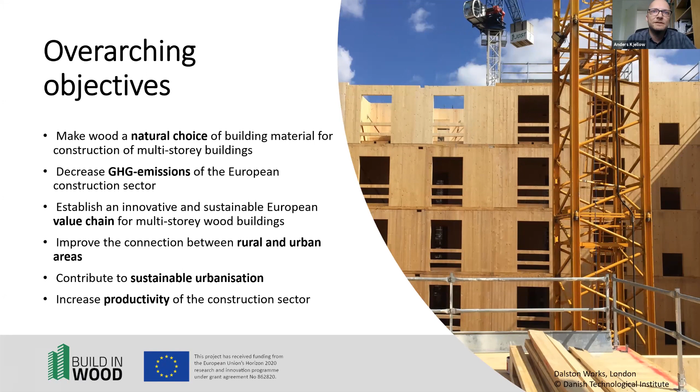We have the societal challenge of urbanization and increasing population, and we have estimated an annual demand for new apartments in Europe alone of about 1.6 million per year in the time between 2020 to 2050. So we have a very large demand for building materials. And if you look at new construction, the emissions from material production are now higher than the expected emissions from the lifetime operation of new buildings. And so there is a need for us to focus on emissions from building materials and not only on operational energy emissions.

There are, of course, many reasons to build with wood. I will not go through all of these, but just to mention a few here. From an environmental point of view, wood is a renewable material, the only one of the major building materials that's renewable. It gives us great opportunities for greenhouse gas reductions through both sink effects, because wood stores CO2 as it grows, and through substitution effects by not using more energy intensive materials.

We also have a range of economic possibilities. Building with wood enables fast construction. It's a light material. You have possibilities of putting more stories on fragile terrain. You need less infrastructure on site. You have fewer transports because it's a light material. It's very well suited for prefabrication, which gives you a high productivity in the construction sector. And so all these things translate into economic opportunity.

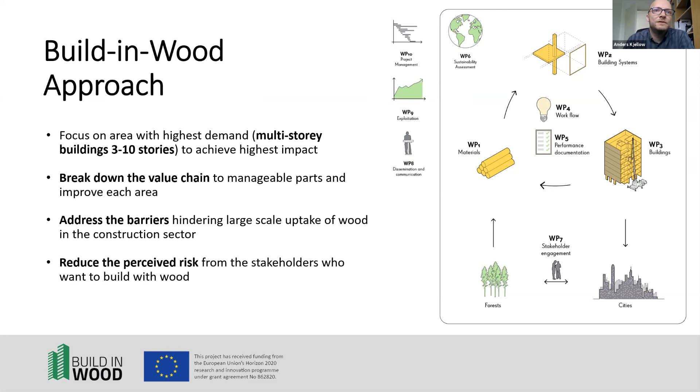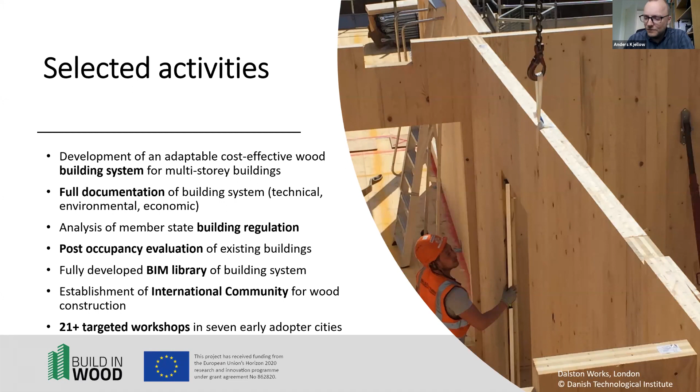We establish an international community for wood construction, and we work directly with cities, arranging more than 20 targeted workshops in these 7 early adopter cities. And so the list goes on. These are just selected activities, but some of these we'll hear about today.

We will start with hearing about the early adopter cities and some common challenges and opportunities, presented by Sabina Leopa from URBASOFIA. So with that, thank you from my side, and over to you, Sabina.

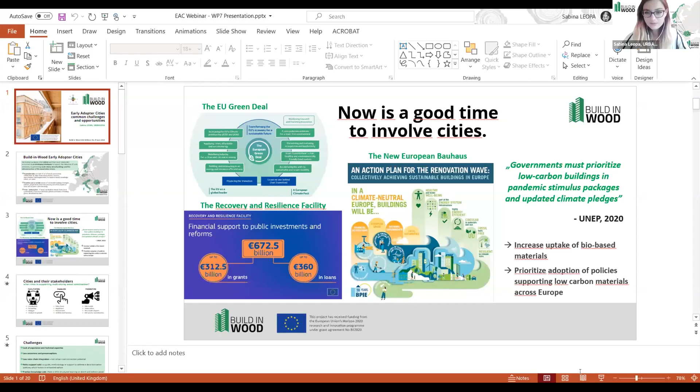Thank you, Anders. Here we are. My name is Sabina Leopa. I'm an urban planner, I specialize in regional planning, and I'm here on behalf of URBASOFIA. We are team leaders of the involvement of external early adopter cities, as we call them.

During this webinar, we want to tell you why we involve cities in this project, and why we think cities and metropolitan regions are very important to include in the discussion about supporting multi-story wood buildings, and why their unique role at the articulation between European policy and on-the-ground innovation is key to getting the agenda going.

So what we do in the project is involve the early adopter cities, EACs as we call them, in developing strategies together to support the reduction of greenhouse gas emissions via the use of multi-story wood buildings and via support mechanisms for multi-story wood buildings.

They have 3 roles in our project. The first is to let us know their needs and requirements, to provide us with data that the project can use, and this part in particular will be covered by the next presentations of my colleagues.

The second is to define and co-create together with a community of practice, a growth coalition at local level — external stakeholders such as building companies, architects, engineers, universities, providers of training, sustainable strategies and pathways — in order to support multi-story wood building in their cities and metropolitan regions.

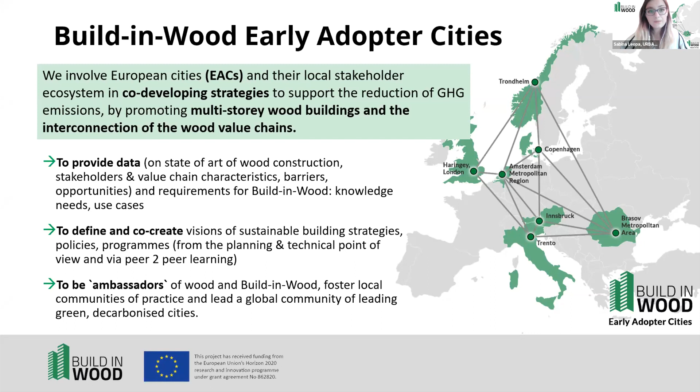We think this is a very good time to involve the cities, because if all construction activity, including renovation, is taken into account in the analysis being conducted at the UN until 2060, construction activity carbon is set to exceed 230 gigatons. The emissions gap report from 2020 from the UN Environmental Program identified that a green pandemic recovery could cut 25% of the predicted 2030 GHG emissions.

So now we feel that, at least in Europe, with the Recovery and Resilience Facility putting 37% of the recovery funding into a green transition, this is a very good point in time to prioritize the adoption of policies supporting low carbon materials across Europe.

What we think about cities is that they have this key opportunity to be facilitators, to coordinate the shift to greener development, to coordinate partnership and local dialogue, but they're also enablers — and this is the interesting part we try to tackle in the project.

They have policy levers that can enable wood either implicitly or explicitly. They can develop regulations, they can change procurement to not be dismissive of wood, and they have the possibility to develop facilities and financing. And last but not least, we see them as role models and as inspiration for other cities as well.

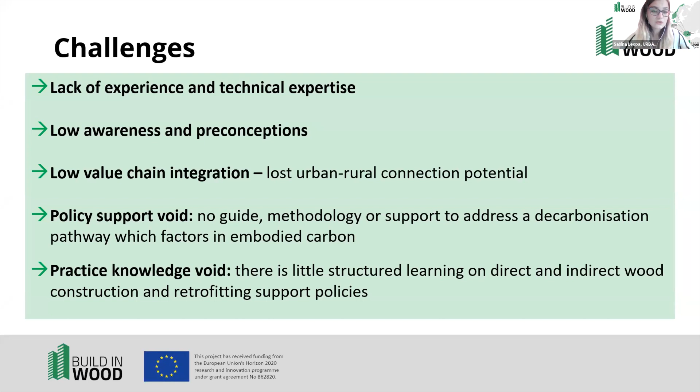So we started from these general challenges, and within Work Package 7, what we did was start involving these early adopter cities, which I'm going to present one by one, to create local communities of practice, to address their ambitions that are either strategic, like net zero strategies, or operational, like new regulations for the built environment, and to support their local dialogue in order to reach these pathways.

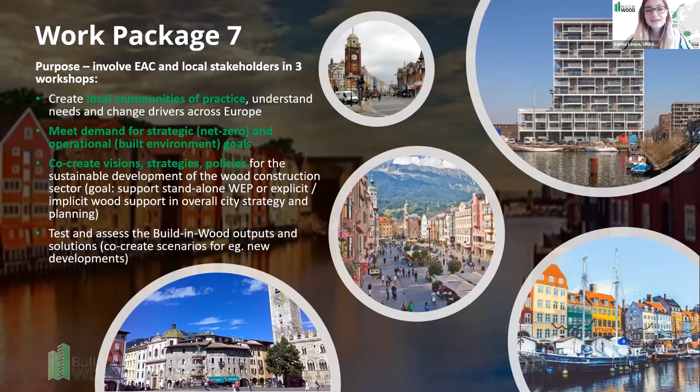Last but not least, there is the possibility to have real life scenarios and real life cases for the Build-in-Wood project, for the design guide and design manual, something that you will learn from my colleagues in the next presentations. So just as a helicopter perspective of what we're doing, we have an iterative process.

We have established a link, a cooperation with the early adopter cities, and they have set up local working groups, so key stakeholders from all the environments. We've prepared a set of questionnaires to understand the needs of these cities, and we looked at their policies and the local context. And then we had a first workshop, which we're going to tell you all about.

And we talked about challenges and opportunities that are personal and specific for that city. And then we looked at the common challenges. In the next steps, we are going to have two more workshops, and we are going to have a European dissemination and networking period.

In what concerns the first workshop, just a very brief introduction to it: the pandemic hit, and then we had this weird online and offline discussion series with all the cities. But all in all, I think that this first workshop actually offered up two very important conclusions.

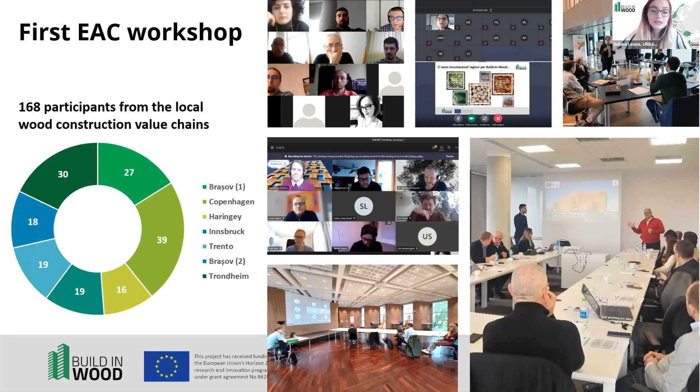One of them is that while all cities have very specific needs, like densification or building up or building out of existing buildings or renovating, or the necessity to supply more housing, all of them have the same legislative, regulatory, conception, and training gaps, and all of these other challenges that could be addressed in a unitary manner.

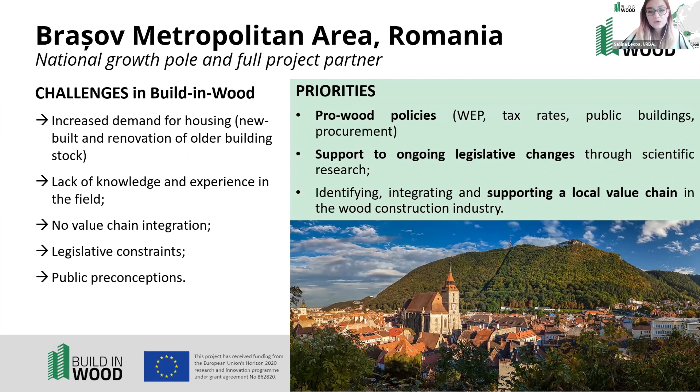We started with the Brașov metropolitan area, which is the full project partner in Build-in-Wood. Just to show you a little bit about the priorities discussed so far, they're looking at pro-wood policies, such as tax rates or wood enabling policies, public buildings and procurement. They look to support ongoing legislative changes in Romania because there is an ongoing movement to redo the whole building code and planning code, and of course to integrate the local value chain.

We are also happy to welcome Copenhagen, and for the last year and a half we worked with Copenhagen on their priorities because they do have a very strategic-oriented approach to enabling wood in the built environment. They have some challenges regarding legislation and building codes.

And of course, each of these cities has gone through a workshop where they discussed what the gaps are and what the priorities would be. So now we can look at strategic pathways going forward.

Haringey Borough is focusing on a retrofit-first approach and is aiming at supporting a building-in-wood policy, either standalone or part of a larger embodied carbon policy, which ultimately could scale up to the whole city level. And of course, there are a lot of challenges they want to address, both about conception and strategy, but also about very operational questions such as ensuring interoperability and encouraging potential future reuse, incorporating circularity principles in the built environment.

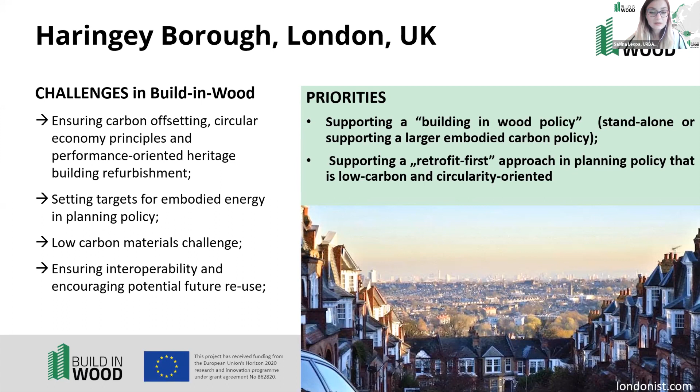Innsbruck is having some interesting challenges about a high density urban area that is constrained by natural elements.

So for them, they want to actually support the shift to wood in this context, and they look at policies for timber construction support, carbon accounting, and perception change at local level, because the perception of wood destined for wood cabins is something shared with Brașov, but it's something that stops consumer adoption of wood at a larger scale.

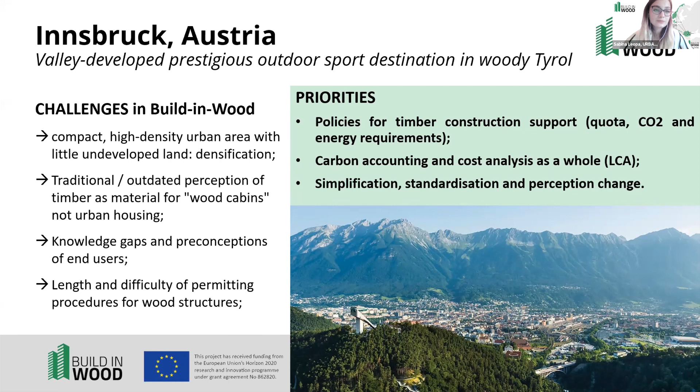Trento is having the same high density urban area issue, and they're looking at the retrofitting needs they have. Their priorities are a city sustainability strategy and embedding wood building in the green policy framework. They are Italy's greenest city, and it's very important for them, because of the natural surroundings, to address this value chain fragmentation and address missing links.

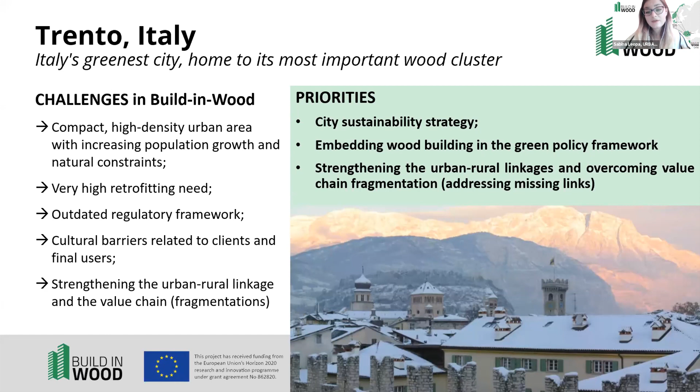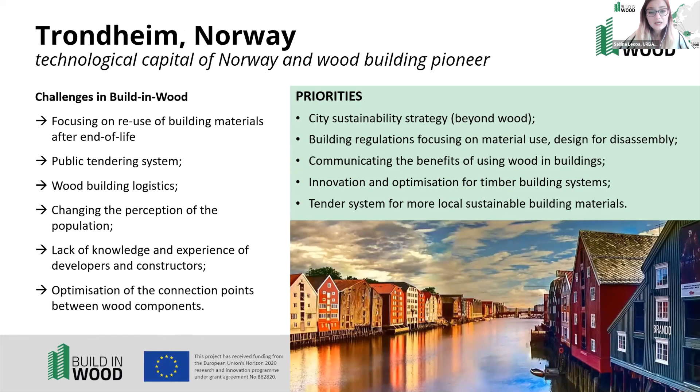So that the urban-rural linkages for local development, a local industrial development for this sector, are supported. Trondheim are our wood building pioneer. They have a lot of experience in building in wood and creating wood supporting policies, and their priorities going forward are the focus on city sustainability as a whole, including and beyond wood, design for disassembly, material use included in building regulations, better communication, innovation and optimization for timber building systems, and they also want to look at the tender system.

Last but not least, the newcomer we're very proud to welcome is the Metropolitan Region of Amsterdam, and they will have their first workshop next week. They share a general challenge with the other cities, but they are also a frontrunner in circular economy solutions. So their priorities would be on policy development, on standardization, and on the integral assessment of sustainability on a systems level.

What we did was cluster at the end all these common challenges and try to support a program that addresses each of the challenges based on its categories: ambitions, targets, visions, legislative and local policy, financing and tendering, LCA measuring and monitoring, and communication and perception change.

Our next steps right now are to focus on two points in the second local workshop. We will have a strategy and policy part connecting all these challenges to either implicit or explicit wood support policies and approaches—for example, looking at building regulations, carbon limits for public procurement, and how to adapt local regulations to be more wood positive.

On the other hand, the Build-in-Wood project is quite advanced right now, so we will also address the possibility for technical and scientific cooperation, connecting local knowledge needs with our evidence-based research in Build-in-Wood, which we'll share a bit about in the next presentations, and also address specific programs such as renovation and densification with digital pilots and technical outputs.

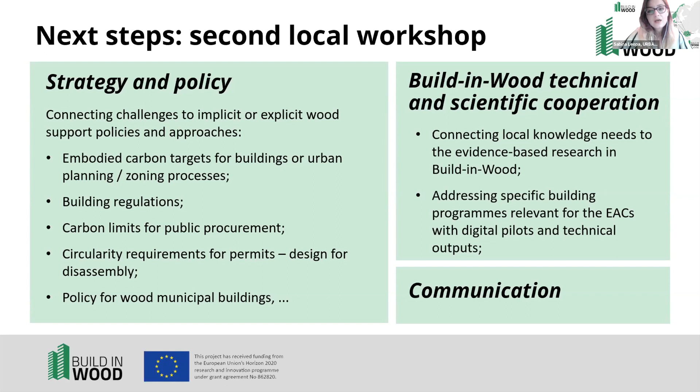The outlook for our final task in the project that we are preparing right now is the methodological transfer and replication support, and our ambition is to ensure the impact not just at European level but at global level, and we're very happy to welcome in this webinar professionals from all over the globe.

We want to widen the cooperation and support other stakeholders and cities, with priority cities, metropolitan regions, and also regions, to join the discussion and join the community that we are going to launch, and also to have policy learning that would support European policymaking for multi-story wood buildings.

It's so great that so many of you are here today to join in this and have such an interest in building in wood. We've been a practice that has focused on sustainable architecture for the last 15 years. We've been building in engineered timber for that time and have become internationally known for our experience in timber construction. So we were delighted to become part of the Build in Wood programme.

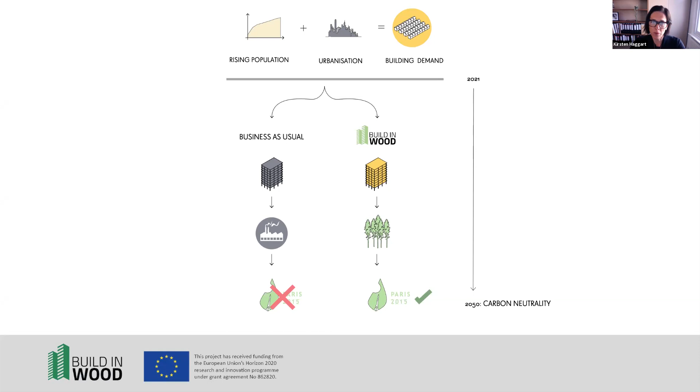As we all know, and I think has been expressed already, if we carry on as business as usual, we won't be hitting the targets we so desperately need to hit. So the reason for Build in Wood is to make timber construction methods common practice in the European construction sector, and to make it easier for stakeholders to choose a healthy and sustainable alternative to traditional construction methods and systems.

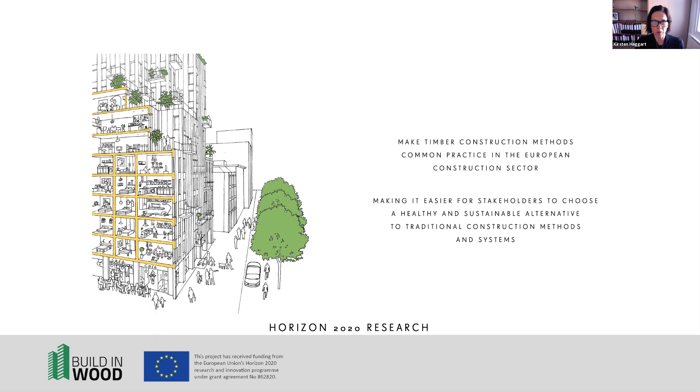So what we're doing is trying to break down barriers, and it's a really fascinating project because it goes from testing small components to understanding what the policy constraints are for timber construction.

I'm just going to talk briefly about the structural system. Our brief primarily was to design a multi-story building system for between 4 and 10 stories, as we felt this was a sweet spot for the kind of development European cities are looking to pursue. It should be adaptable for both commercial and residential use, so from the outset we're thinking about demountability and change of use throughout the process. It also has a facade panel which can be used on retrofit as well as new build.

We're looking at different climatic conditions across Europe and different regulatory requirements, which we've analyzed with our partners to understand the range of thermal, acoustic and fire requirements for buildings across Europe. We're also looking at retrofitting, which is a key part of becoming zero carbon, because we need to upgrade our very low quality building stock.

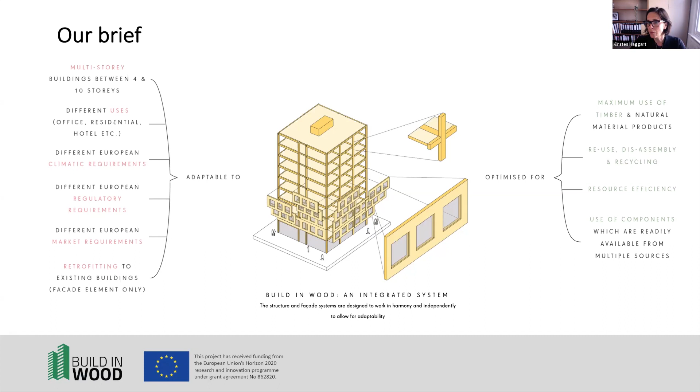So we need to optimize it for reuse and resource efficiency. When thinking about the principles for the Build in Wood system, it's integrated so it can be adapted to different uses. It needs to promote the use of timber, and it needs to be adaptable, considering the criteria for each project.

The way we've designed it, when you're using this system, you can plug in your different regulatory requirements. You can plug in what your uses are, whether residential or commercial, and then apply those individual requirements to the system.

We've developed a range of different build-ups and details for the system to cover low, medium and high regulatory requirements, and we've looked at different material solutions. The system itself is currently going through testing and accreditation.

The key aspects of the system, when thinking about using it, are to define the dimensional range, define the materials we want, and define the beam orientation, so that we know all the services will work in a sensible way.

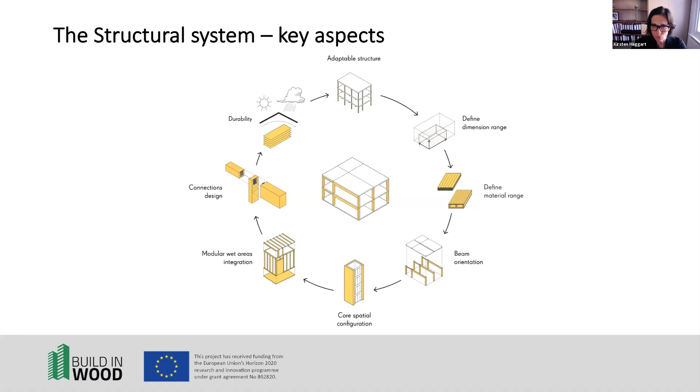The adaptability of the structure is key. We found that if we took this small area of Hackney in London and applied the system to a range of buildings, and given that the system can be increased or decreased in size and can change in use, we discovered that 70% of this area of London could be rebuilt using the system, as you can see here.

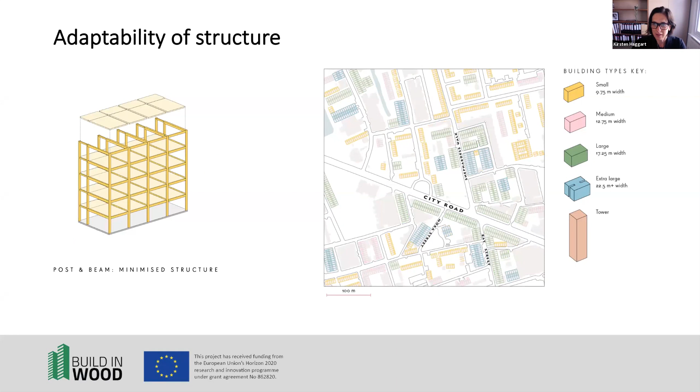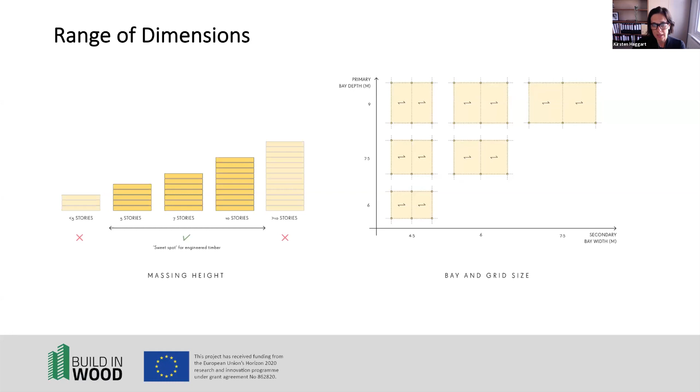As I mentioned, it ranges from 5 to 10 stories, and with that we have a range of bay and grid sizes to accommodate that. Obviously, commercial use requires bigger spans than residential. Fundamentally, it's a post and beam system with CLT or rib deck floors.

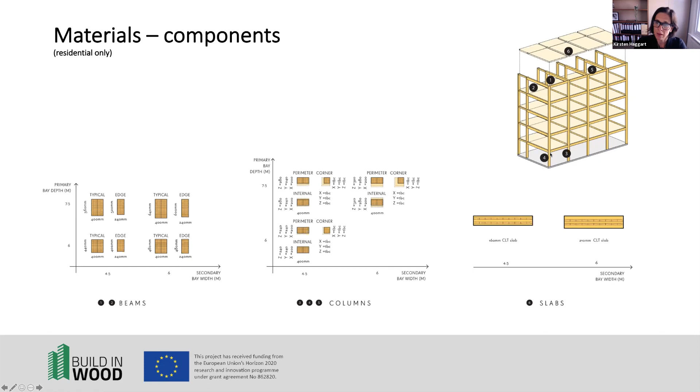Looking at stability, we've considered a range of options depending on the scale and height of the building. Fundamentally, the core and some internal structural walls provide sufficient stability for the building, and the core can be either timber or concrete.

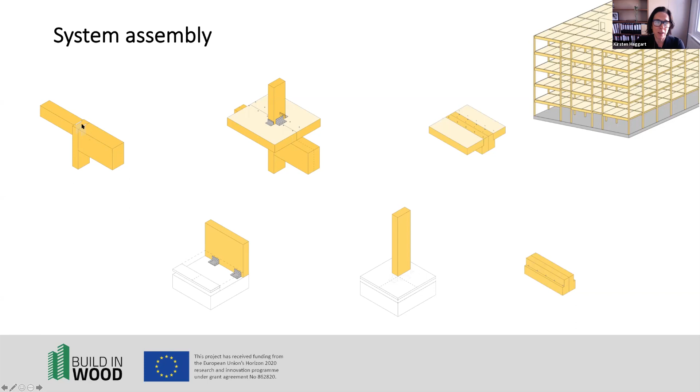We've looked at the detailing of the system, which is very important. Building in timber is a really simple thing to do. It's basically getting these L-shaped plates that connect walls to floors, and then we've got some very nice connection details which sort of disappear, which you can connect the beams to the columns.

What we've tried to do is make the floor construction as easy as possible, so you just lay that on top of the beams. But in certain circumstances where you might need an increase in floor to ceiling height, for example in residential, the beams can be cut out and the slabs sit on there.

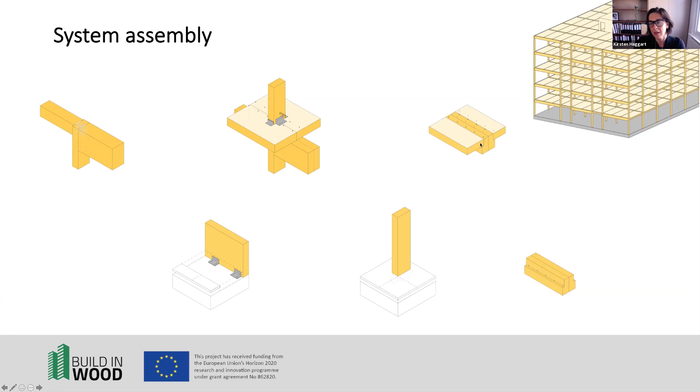We've thought about durability, and in the design guide that's going to evolve out of this, we'll be highlighting key measures to ensure the durability of timber structures. Lifting the timber off the ground is one key part of it, and that can be done in several different ways, depending a bit on the type of use for the ground floor. Often you can have commercial on the ground floor and residential above, so having larger spans on the ground floor in a concrete structure might be suitable.

And then also looking at roof structures, making sure that we don't lay an entirely flat roof. There needs to be a slight pitch so that water can drain away easily.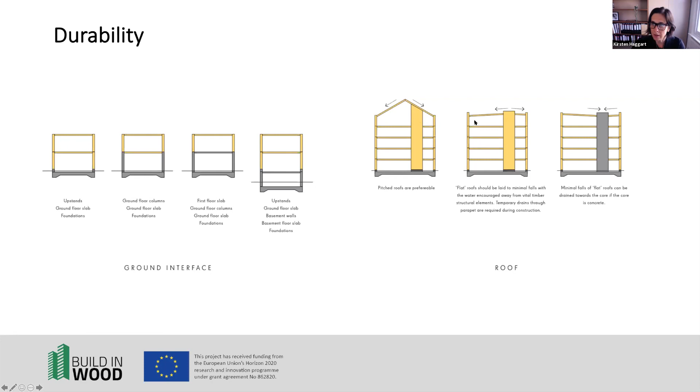Some of the key aspects of this are that we want to make the choice of materials as efficient as possible. In this case, it's a timber frame facade panel. One of the key factors with facade panels, especially off-site manufactured ones, is that they must be stable as they're transported, so the size of openings is key, almost more for the transportation than for the actual final install.

We also needed to make sure that it was very easy to install, so the panels go above floor plates, allowing you to easily get a connector in between the top of the floor and the panel itself. Ease of assembly, trying to avoid the use of scaffolding if possible - what we've tried to do is make it all possible to crane in. Production line ease is really important too, so it's a cheap and easy solution to fabricate.

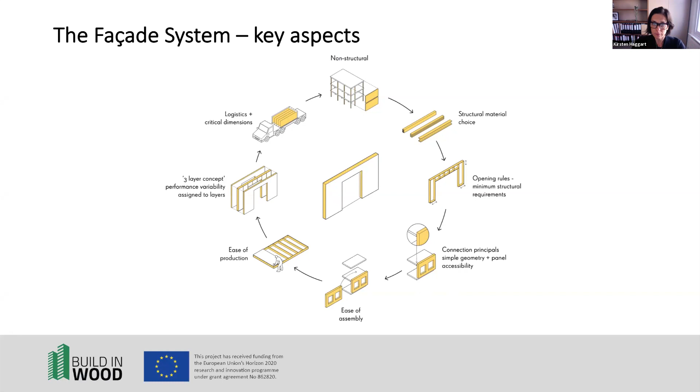This talks a little more in detail about how the facade panel is built up with this 3-layer concept, with the external lining providing the rain screen, breather membrane, and the insulation layer, which is the variable factor. The core is a timber frame with OSB board and vapor barrier for air tightness. The internal lining allows for acoustic variation, and services can also be easily installed within the lining. So it's a very simple system and very easy to put together.

Fundamentally, it can be used for any kind of building that the market may demand - residential, commercial, and we've already done a prototype project for a retrofit extension to a project in Trondheim, where the same system was applied to add two extra floors of housing onto an existing estate outside Trondheim.

So this kit of parts is completely demountable as well as being adaptable. It also has no wet trades in any of the details, which means that the demountability and end of life of the system is enshrined in the design.

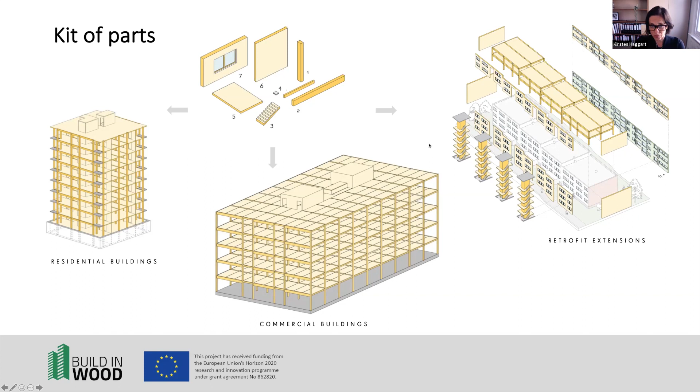And as I mentioned before, it's open source. So the goal is to enhance the way that we see timber in construction. Currently in life cycle analysis, the end of life is just about burning timber, and what we want to prove and show is that it's so easy to take a timber building apart and reuse it in a different use if that's what's required, or you can reconfigure the building to change the use from residential to commercial.

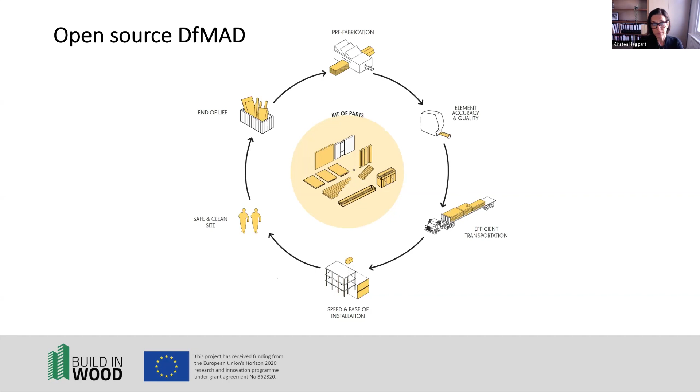And so this gives you an overview of what the system guide will contain. It will have a description of the system, as we've talked about. It will show the components that the system will be made of. It will then talk about how that can be configured in lots of different ways.

So ideally what we will be showing is that if you have a residential building of 6 stories, you can plug in what your requirements are for your building, residential or commercial, height, length, the footprint of the plot, and then we will be able to start to show how many elements would be required for that, and it will be able to size those elements for you.

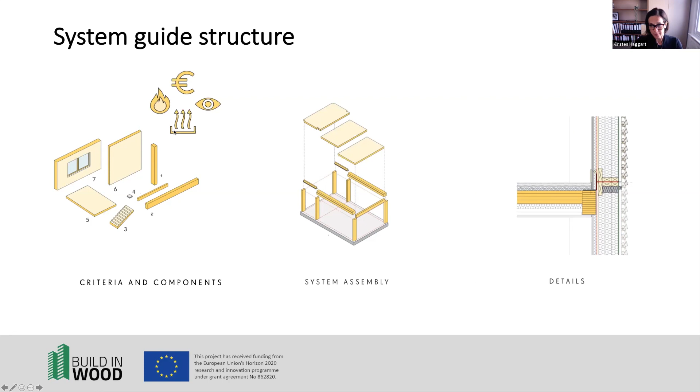And then there will be a guide on the detailing and durability aspects of the system, so that any lessons learned from other projects that we know of are brought into every new iteration of the building. And I touched on this a little bit earlier. What we've tried to do is to make it as simple as possible.

So overlaying floor plates on top of beams, rather than trying to use beams. So in this example here, the beam is less deep than it is wide, and that's not the most efficient use of material. So the way that we've designed the post and beam structure is to be as materially efficient as possible, because while we want to use timber, we want to use it in the most efficient way. And where we do need that extra bit of height, we have got a detail which shows the floor plate sitting on top of a beam.

And this goes into a little bit more detail about how the slabs and the glulam post and beam structure integrate to ensure that the services can be integrated into the building effectively. So we have this service corridor running along here, and the services then go into each of the bays along the building. We decided against some of these other options because it was less materially efficient, or the way the services could be distributed was not as efficient.

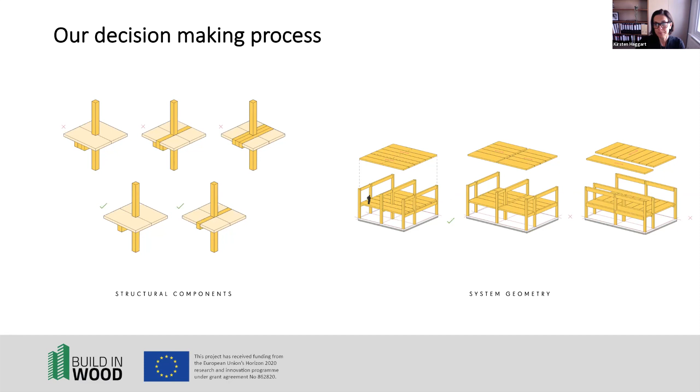And then for our next steps, we're looking at prototyping and testing. So the system itself will be tested for fire, acoustic, and thermal performance. Some of these tests have already been done, some of the smaller ones, and then we're going to do some large-scale testing as well, which will happen at the Danish Technological Institute. And that will be for the bay itself with the facade panels on it, but also individual components are going to be tested on a case-by-case basis. So we have this large-scale prototyping going on, as well as small-scale 1D tests.

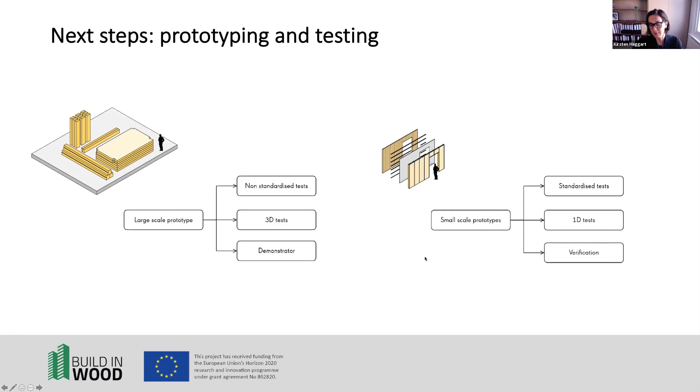And then thinking about life cycle analysis, which is a key factor in development of policy as well. We're finding in the UK that there's been an exponential increase in understanding what the embodied carbon implications are of different materials, because of needing to give a life cycle assessment when you're submitting planning applications. This is something that's going to evolve over the next few years, I think.

Currently in London, there's a fact-finding mission where life cycle assessments are being done on buildings that are going into planning to get a sense of where people are at the moment, and then that will be overlaid with a series of targets that we should be achieving, which relate to working towards zero carbon. And so the more we can support the life cycle analysis of timber buildings, the more successful that will be.

And currently the sequestered carbon within timber is not factored into this typical assessment that we use. And so we're lobbying heavily to try and get an overlay to this, which includes sequestered carbon. And also in this analysis, as I mentioned before, at the end of life the only way to deal with timber is thought to be either burning or composting. But what we're also working towards proving and identifying is the reuse of timber in construction.

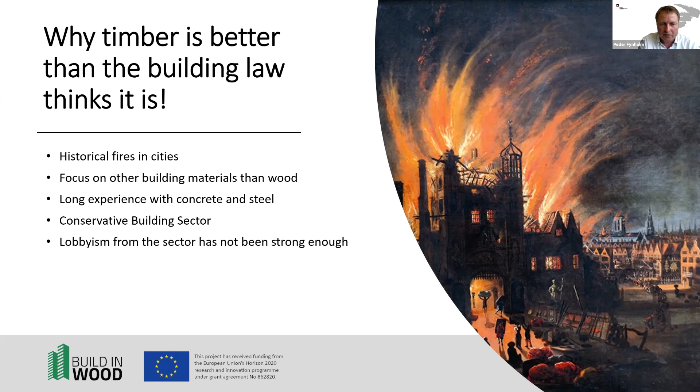Then we also have a very conservative building sector, where it takes a long time to actually adjust inputs, and we must also say that maybe the lobbyism from this part of the sector has not been strong enough to change these things.

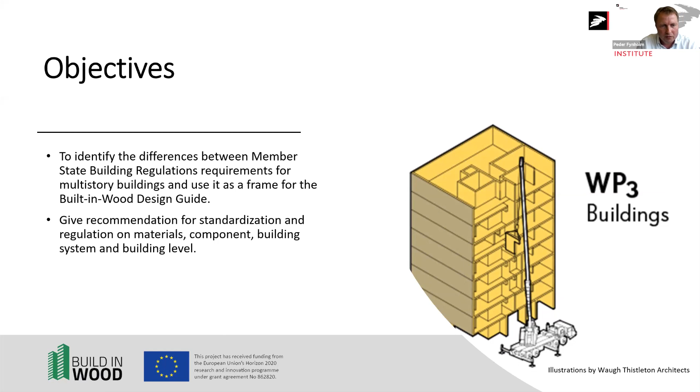So our objective in the project here has been to identify the differences between member states' building regulation requirements, especially for multi-story buildings. And we also have some inputs to give recommendations on how to improve these areas, both on material and component, but also building system and building level. We have made two focus areas, you can say. One is to create the regulatory overview, and another is to look a bit deeper into the design criteria.

We have heard from Sabina earlier that we have these early adopter cities, and we also have a focus on having inputs from them, and hopefully it will also be possible for us to give input to those cities, as a starting point at least.

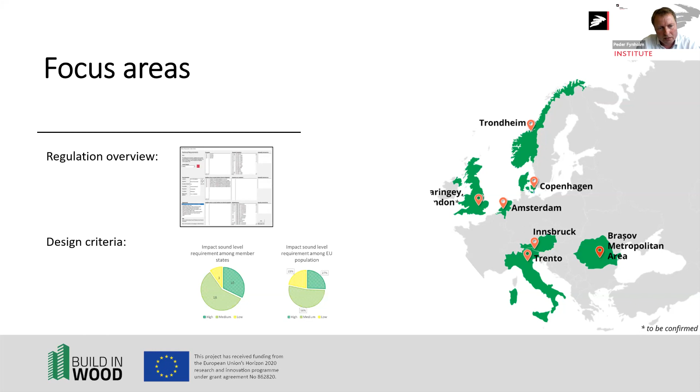So why are we having this approach? Well, today we do not have this overview. There's no single entry point to be found in Europe. We also need this work, as Kirsten just told us, for our building system development and its adaptability in Europe. And then we hope by doing this that we have created some kind of template that might be useful not only for the consortium partners, but also for the sector outside the consortium.

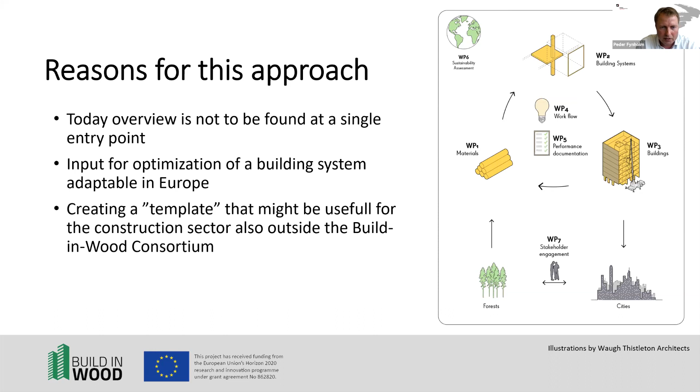And what makes this difficult then? First of all, we talked a bit earlier about tradition and experience. It's not short term to change these things. Then another thing is that we have different needs for building performance around Europe, of course, different snow loads, different needs for heating, cooling, etc.

And there are also different levels of the supporting tools, how our fire brigades are set up and stuff like that. That also has an influence on how to set the rules on national level when it comes to building regulation. When it comes to the national annexes that we are using in relation to Eurocodes in Europe, there's no harmonized access to these national annexes. So therefore, we have also tried to deal with that in our work.

And of course, then the lack of harmonization. We have different schemes and descriptors, especially for acoustic performances of buildings, that make this kind of harmonization a bit tricky. So looking a bit more into the work, we have tried to divide the work in how these things are set up on a more general basis. There's some literature on that which gives a very good overview of this issue.

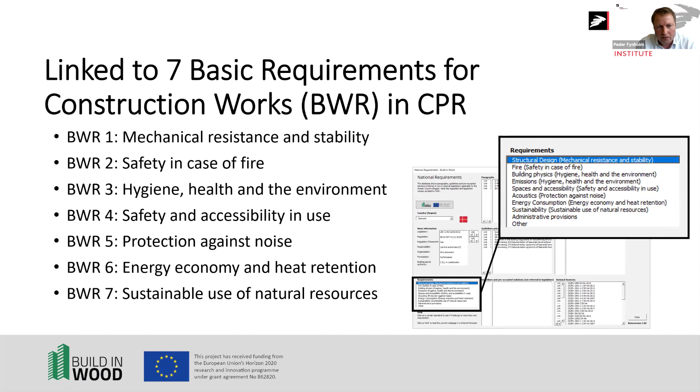We have tried to link this work to the basic work requirements for construction works mentioned in the CPR, the Construction Product Regulation, and by this also have an interaction with the framework around how to declare performances on construction products.

I won't go much into detail with all the features there, but there are different things that we can link to the paragraphs. We can also have direct links to where to find the documentation, where to find the guidelines, some basic information about the specific member state regulation, and then again filtering options on the different areas there. So this is the overview.

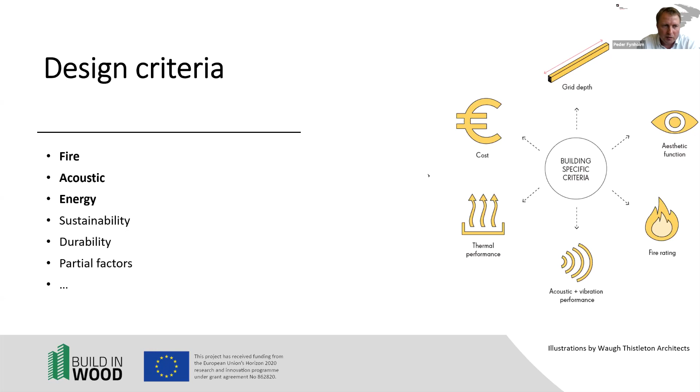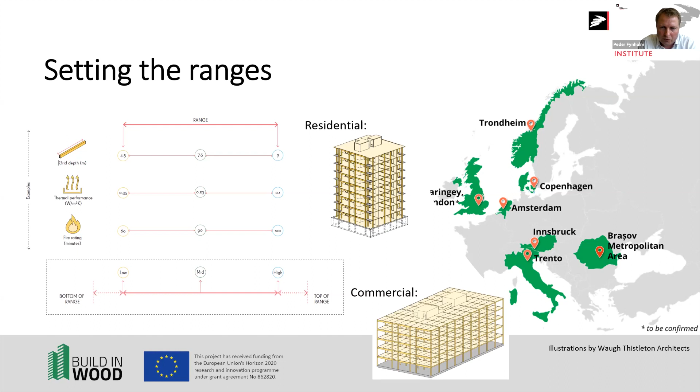Then going into the design criteria, there are of course a lot of areas that are important for designing a building. We have not covered them all with this approach, but what we have tried to do is look at some of them, the fire, acoustic, and energy parts, because they are some of the tricky ones, especially when we are comparing requirements between member states. So, as Kirsten also mentioned, we have tried to divide the work into what the requirement is on the residential part, what the requirement is on the commercial part, but also what range we need to aim for to have an adaptable system here.

On acoustics, we have of course the airborne sound insulation and also the impact sound level that we need to look into. And as mentioned before, there are many different descriptors used today in this area, and that makes it a bit difficult to know what to expect and what to aim for, especially when you have to provide a system that could be fully adaptable throughout Europe.

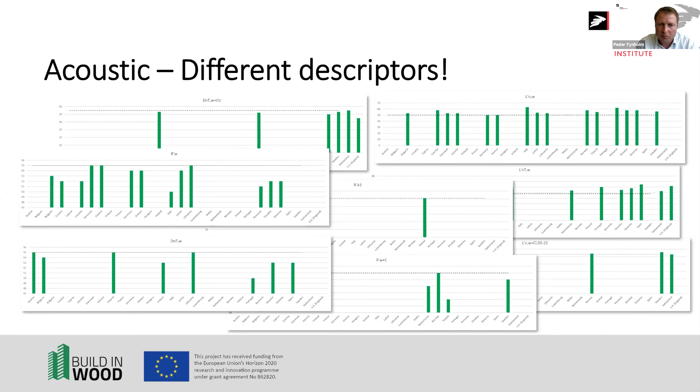We have tried to make these sheets in a way that we are able to filter by member states. We are also able to see the different descriptors and have the reference to the documents where we found the information. One thing is to look at a member state and then try to divide these levels of high, medium, and low into different member state requirements, but we can also normalize these values to the EU population. So that sometimes makes the graphs a bit different.

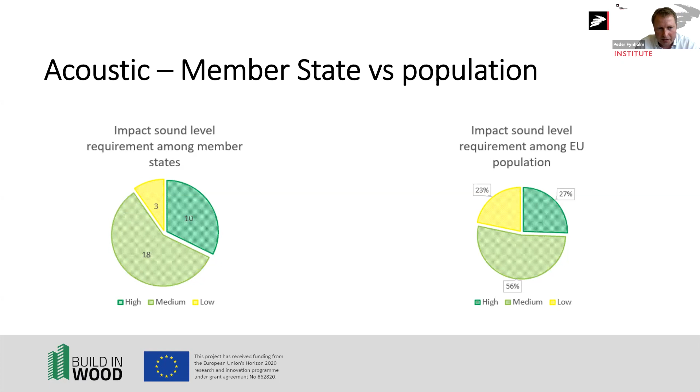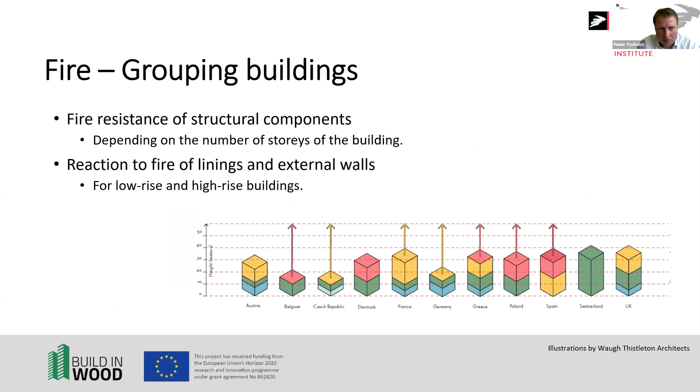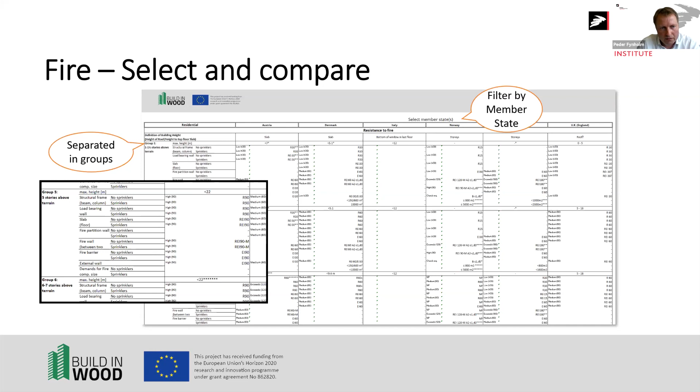On fire, we have looked into the reaction to fire and also the resistance to fire. Resistance to fire has the focus on the structural components, and reaction to fire is more for the linings and the external walls. There are more lines in these Excel sheets for grouping and filtering the buildings, and here regulations are not described in the same way. What we have tried to do is group them by number of stories and set the framework there so we can better compare the different requirements. Again, we have tried to do it member state wise or population wise. Here we have some different levels when we talk about resistance to fire, for instance.

So what we would like to do further, because we have actually done some work already, and the spreadsheets are to be found on Zenodo with quite a lot of data in them already, is to have them improved and validated in a better way with more specific data, and also get input on how these things can be useful outside our consortium.

So we are looking for collaboration on this part, to improve and validate this, and also to make this output useful for the timber industry to tackle these regulatory barriers throughout Europe, and maybe also have this work point at where we need to focus our legislation at national and European level. So we would very much like to have input on this part also from outside the consortium. I think that was actually all for me at this point.

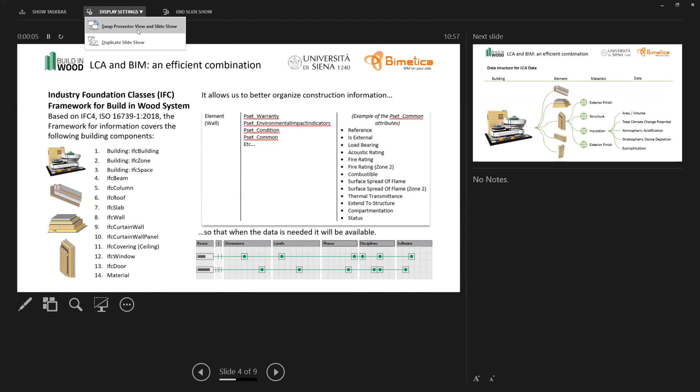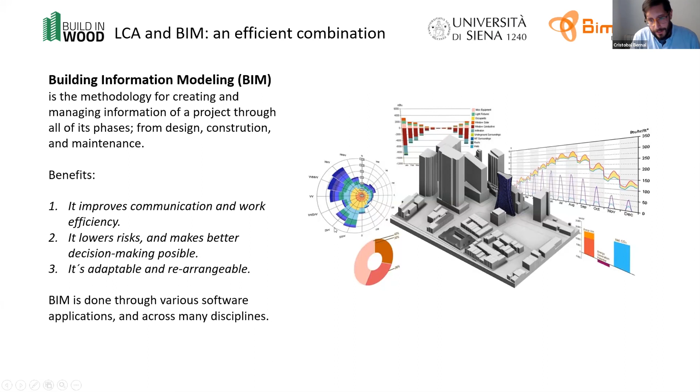So, as you can see in this image, you have one project, and what BIM can do is, if you have this project with all of its data, you can easily see the project as well as its graphical aspects, but also see the project's data within itself or within the environment. So we have the ability to work not only graphically, but also through data, which makes our practice much more powerful in construction.

What we've done for the Build in Wood project is, first of all, we started with the Industry Foundation Classes, or IFC framework. I don't know if you're aware of this, but we're working with IFC4, which is an ISO standard, and this practically gives us the whole range of data that we can use to input project specifications.

From this, we've developed 14 templates for building, zones, space, beams, columns, roofs, slabs, walls, windows, doors, and materials. This allows us to map correctly the information that we want to include in the project.

Just as a brief example, we can have an element such as a wall, and we have groups of information as property sets, or P sets as they are known: warranty, environmental impact indicators, condition, Pset common, etc. Within these, you see the range of information we can add to our project, such as whether it's external, if it's load bearing, what's the fire rating, if it's combustible, or does it compartmentate, or what's the status.

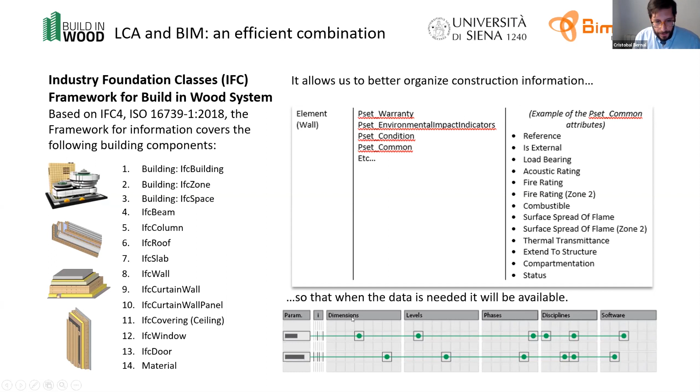The idea of having this whole framework implemented is that it can be used when it's needed, for example by different types of professional disciplines, on different types of software, different phases of a project, depending on the level of implication needed and the level of development the project may be in. So it's quite flexible.

How does this information work? Now, in terms of the LCA information, if we go to the left-hand side, we see a project made out of Legos, which I think is the best way to explain how we divide a project into elements, or divide the whole project into information. Each individual piece, which we call an element, is divided into its proper categories, for example it might be a roof, a floor, wall, beam, or column.

Within each element, there are a set of materials associated to it. For example, if we take the wall, we might have the exterior finish, the structure, insulation, and the interior finish. From the insulation, we have the LCA data included, for example it could be just the area, volume, or even weight. We have the climate change potential, atmospheric acidification, stratospheric ozone depletion, and eutrophication.

Concerning our first test, as I said at the beginning, this is our first attempt to understand how we can benefit from including LCA data within a BIM environment. We started by choosing a very easy element. We chose, together with the leader of work package 2, the architects working with work package 1 that deals with material assessment, some elements, the ones you can see in the list in this slide, because we wanted to test our first bay. So we chose this element together and implemented LCA assessment.

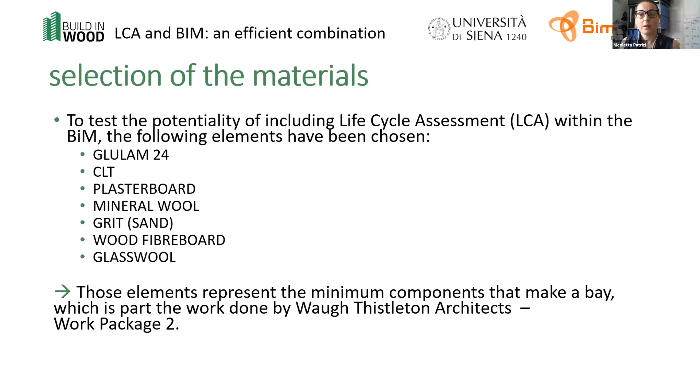Next, what we did in terms of LCA calculations: we decided to create a database made of all the results in terms of product declaration, environmental product declarations. Since we would like to have general values at the European level, we decided to have an average value, meaning we are not referring to a specific producer for that element, but to European values.

This enabled us to have a very first attempt of the LCA evaluation. We created these values concerning different functional units based on the most representative one of the elements, and we set the system boundaries from module A1 up to module A3, since we are focused at this moment on the production process. Then we selected some environmental impacts, the ones you saw before in Cristobal's slide: acidification potential, global warming, climate change potential, eutrophication, and stratospheric ozone depletion. We know these are not all the possible environmental impacts, but we chose these four just to have the first test and get results more varied than only presenting the climate change potential.

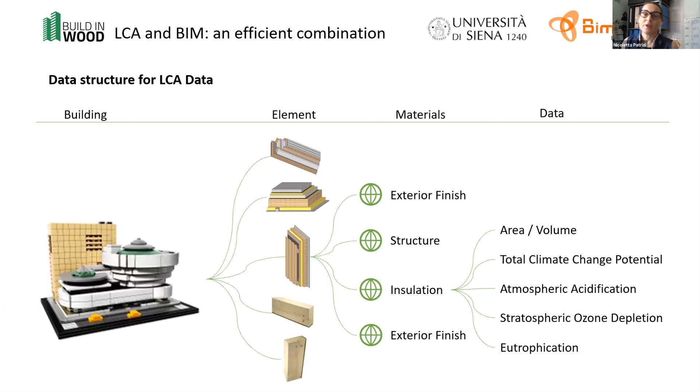For those elements for which we don't have an environmental product declaration available, we retrieve the environmental impact by calculating it using data from the ELCD database, a European-level database containing many processes already modeled inside, and we assess those impacts according to the CML-IA method, the one also used for the production of the environmental product declaration. I forgot to mention that we decided to use data coming from environmental product declarations because that data is certified, as well as the data coming from ELCD being certified. So we can consider this data as solid and reliable.

Once we finalized our database, we extracted the data and passed it to Cristobal for including in the framework, as he said before. Thank you. So our result for this is having the information ready for us to input into the software, which would be Autodesk Revit, the most used BIM software today at an international scale.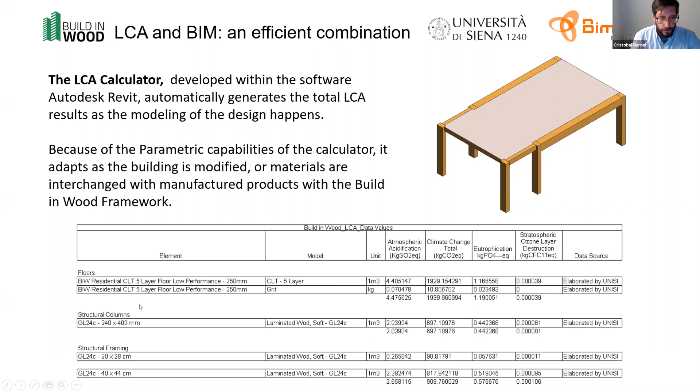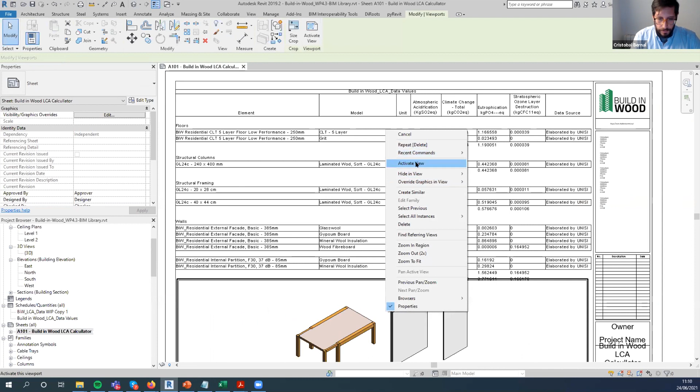You can see we have the floors, the columns, and the structural framing already laid out. So, but I will change graphics here, and I will give you a rundown on how this can look. So we have here the software that is Revit, with the list of materials, as I showed you.

If I were to eliminate these objects, you see that everything starts to go blank. There is nothing shown. But when we start adding in the data, which would be based on the components that we are using, if I add one component, I already get the calculations for, as I said, the total element level and as a whole project.

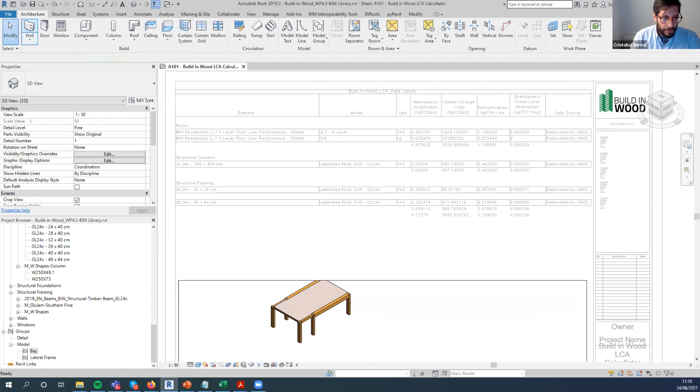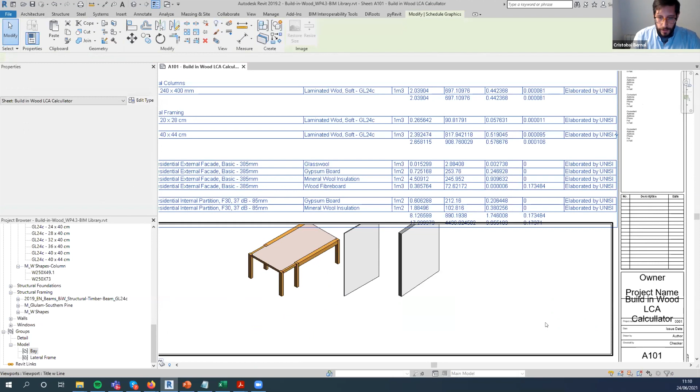That means that if I add more elements to this, such as a wall, I can also draw a wall here. And now I get walls with all of the components already added up. So this can save us a lot of time and also provide information in order to reach the desired results or the benchmarks that we are looking for within a project, all of this while we are modeling or designing our project. So it's quite an efficient combination.

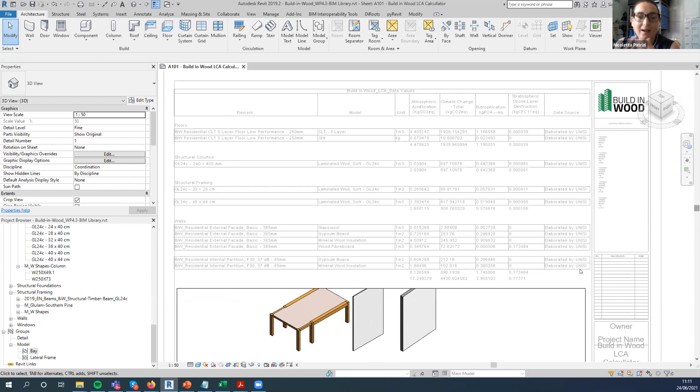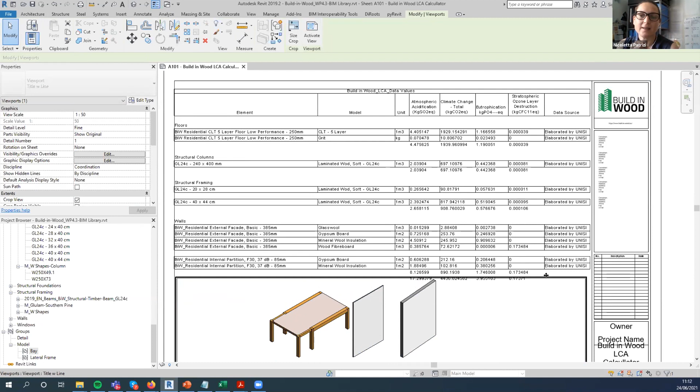I would just like to add that by having this calculation, we consider this as a very first check of the environmental consequences of the design choices. So when we have finalized the BIM with all the elements included, we will let designers choose different elements of different materials for the same purposes and see the consequences in terms of the potential impact. Anyhow, we are well aware that these results represent a very first and easy way for LCA calculation of a project.

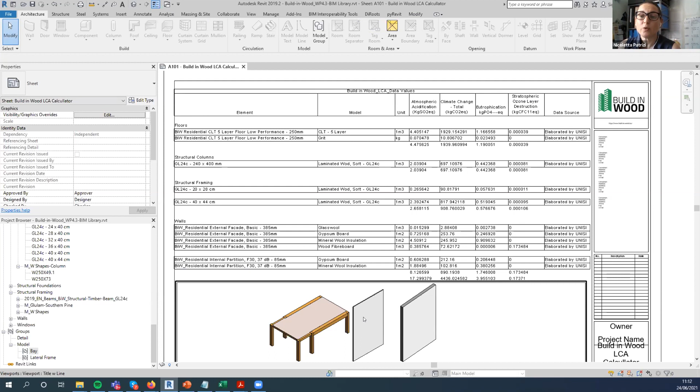The whole LCA should be implemented considering the whole life cycle. But this is a first double check that is, in our point of view, very important for designers and to let them know that there are also environmental impacts that should be taken into account while designing a solution or a building or whatever they would like to design.

Okay. And also I would like to add that this being a parametric software, it's still not limited to only one design. It can be adapted to any kind of design that you might be looking for. And depending on the design that you have, the representation is accurately at the generic level with the LCA data. The idea is for this to give you a first glimpse into your project's performance in terms of sustainability, and then swap these elements out for manufacturer-specific components.

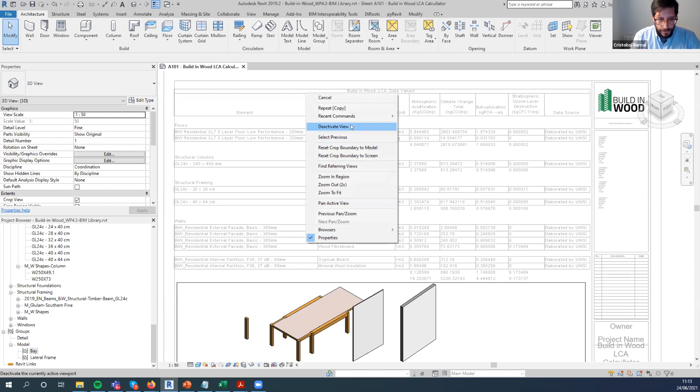And having said that, this will be the end of our presentation. I don't know if you have any questions.

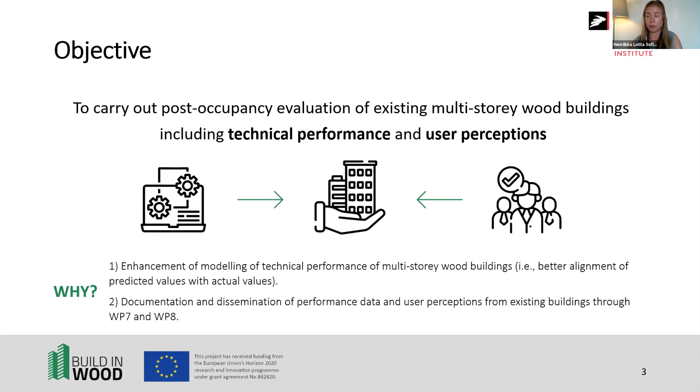So the objective of this task is to carry out post-occupancy evaluation of the existing multi-story wood buildings. And the approach includes both evaluation of the technical performance of the buildings, as well as perceptions of the building occupants. And the motivation behind this work is to achieve a better alignment between the design values and the actual performance in use, and then to document and share this knowledge.

To assess the technical performance, our primary goal is to collect data that is already calculated or monitored during the earlier phases of the building project. Then to compare the estimated values with the realized performance of the building, and also to compare how these technical performance and the user experiences align.

The main focus of the technical performance assessment is on energy consumption, acoustic performance, indoor climate, and indoor emissions.

For us to evaluate this, we are investigating historical, measured, and surveyed data that we can acquire from these buildings. In some cases, it might be possible and relevant to also carry out on-site measurements to support this existing data.

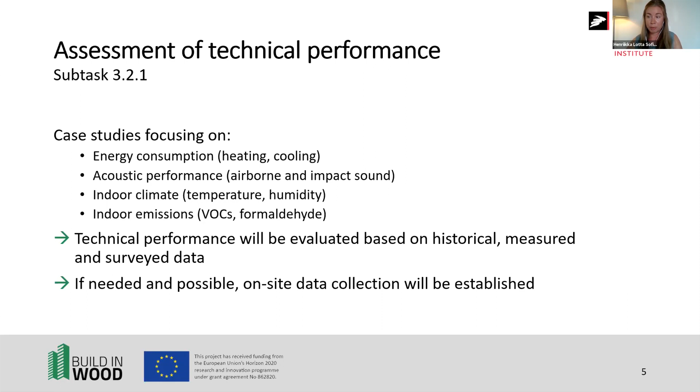My colleague Sofie will talk more about the assessment of user perceptions. Thank you, Henrikka. At the Alexandra Institute, we are responsible for the assessment of user perception of living in these multi-story wooden buildings that we are discussing today.

Throughout the project, we will conduct a number of case studies across the participating countries with the aim of unfolding the user perspective. This is a question of what leads occupants to move into wooden buildings, and how important are the building materials in this choice and decision making.

It's also investigating what experiences the occupants have when they live or work in these multi-story wooden buildings, and to which extent these materials are important in people's lives and in their perceived experience of living or working there.

So we are focusing both on users as the occupants or the people who work there, but also the people who will work with the building - the facility management, how their job and the tasks they perform are impacted by the materials that the building they are working on and in is made of.

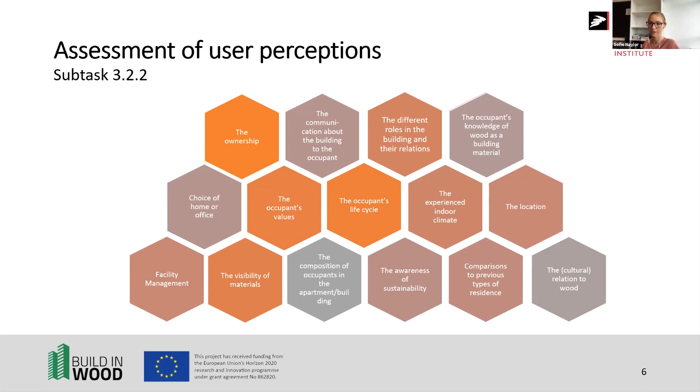Henrikka, you can go to the next slide. So the objectives of our task are to understand the role of the building materials and to understand how wood as a building material performs through experience.

As Henrikka said, one part is to identify whether the building performs as expected, and we are adding the perspective on whether these measurements are the ones that are relevant for the actual final users.

It's also to enrich the strategic branding of wood as a building material and to identify what is important, as I said.

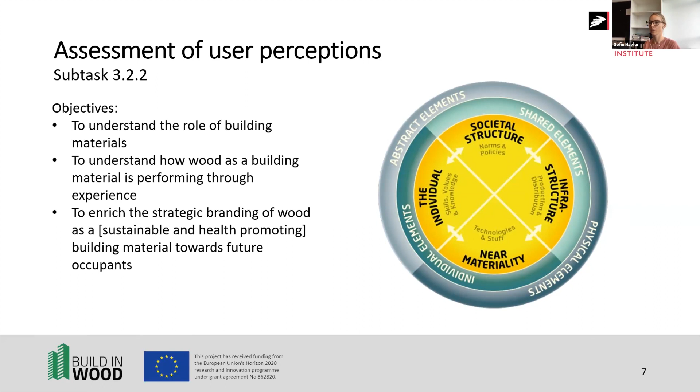If you go to the next slide, we have conducted one pilot study now in Denmark, together with the Technological Institute, where we've added these two perspectives from the technical and the user perspective, and we are ready to broaden our horizon and look at the rest of Europe and maybe some early adopter cities as well.

We would be very grateful if you have any candidates that you know of, any buildings or contacts that you think could be relevant to look into.

Broadening it to a European perspective, of course, means that we will be able to look at what is particular for different countries, because there are a lot of variations in the skills and in the cultural view and history of building with wood.

Okay. Thank you. Thank you all.